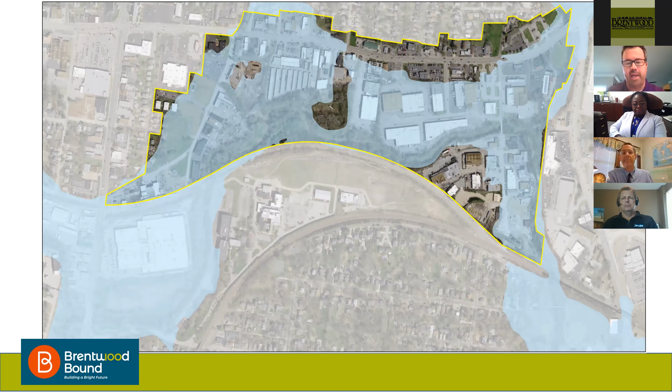So this is what that area looks like without the flooding. Your homes are over here on the left. Again, Brentwood Boulevard's here, Manchester Road goes across, and Hanley Road is over here.

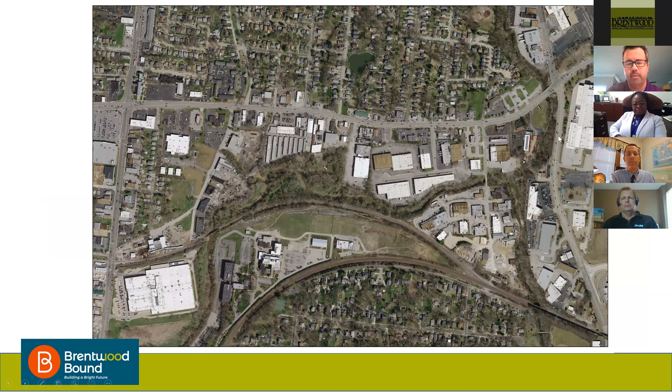This slide shows when Brentwood Bound is complete, what it will look like. This shows all the flood mitigation improvements and all the park improvements that we're calling the Deer Creek Greenway Connector.

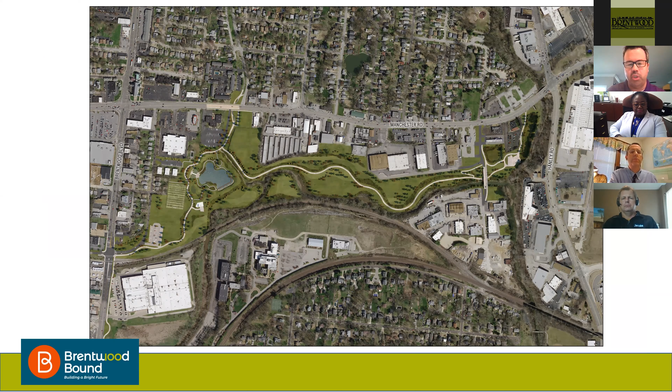This slide shows that once it's done, and during that same storm event that I showed you earlier, the water is captured in the areas where the city ultimately wants the water to go. That means the water is no longer going to Manchester Road, and no longer flooding the buildings along Manchester Road, to allow for future improvements to occur.

This is being done by making Deer Creek a more efficient creek, building these lakes to allow water to be captured during storm events, and also by removing some buildings from the floodplain.

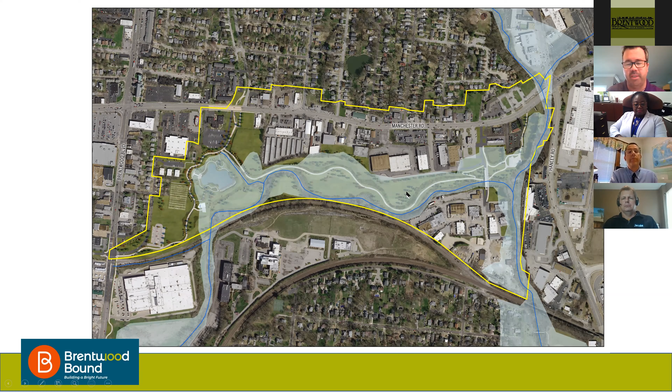The next project is the Manchester Road improvements. While the city was working on how to address the flooding, they learned about how MoDOT was doing improvements on Manchester Road from Hanley all the way down to Lindbergh and Kirkwood.

The city was able to work with MoDOT and, for a fraction of the cost, do enhancements beyond the MoDOT enhancements to improve the Brentwood section of Manchester Road.

Some of those improvements are mill and overlay pavement along Manchester Road. As you can tell, the road direly needs it, especially as Missouri American Water works through the corridor as we speak. They're also going to replace the bridge at Hanley Road and Manchester, and do sidewalk, ADA, and traffic signal improvements.

Some enhancements Brentwood is going to do include building a tunnel underneath Manchester Road where Mary Avenue and Van Mark Way intersect Manchester Road. That will allow safe passage for pedestrians from the new Norm West Park to the south to Rogers Parkway to the north.

Brentwood's paying for additional street signage and decorative lighting. They're improving the access management of businesses along Manchester Road, creating more safe conditions, and they're also going to add a 10-foot wide shared use path on the south side of Manchester Road.

So ultimately, when you enter Brentwood, either coming from the east near Hanley Road, or from the west where Brentwood starts at Bremerton, you'll immediately notice the differences on Manchester Road in the Brentwood area. That's a quick high-level overview of the flood mitigation and Manchester Road improvements.

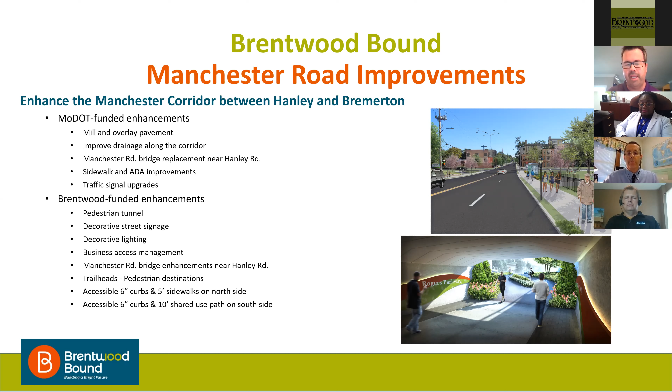I will now turn it over to Andy Franke. He is the landscape architect for Brentwood Bound, and he will talk about the park improvements.

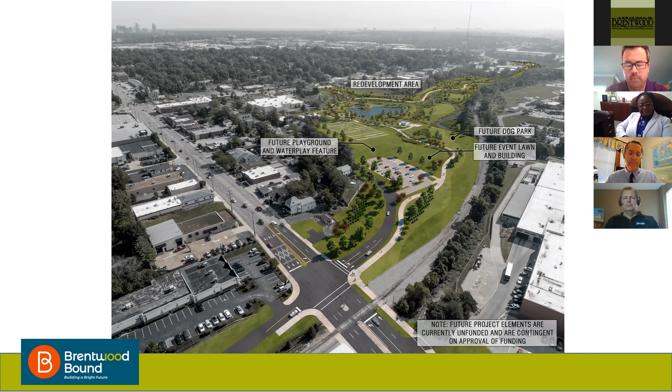The after image shows that where the GRG connector trail will come out on the south side of Manchester Road, under the underpass that's going to be built as part of the Manchester Road improvement parts of the project. You can see the GRG connector trail snake through there. One of the things that's really apparent is you can see the Mary Avenue storage basin right in the middle of the image. You can also see the Phase 1 trail that will peel off from our GRG connector trail and move down through the flood mitigation area.

This is a reverse image. On the right-hand side of this image, you can see the soccer field and then the future dog park as well. This gives you a pretty good idea of what's going to happen within Norm West Park. One of the other things you can just barely see in this image, just below the soccer field, is the Executive Walk Parkway, or Executive Walk apartments, that will remain as part of this project.

And finally, a little bit farther on the east side, not immediately adjacent, but near those apartments, will be the amphitheater. So that's the after image for that one.

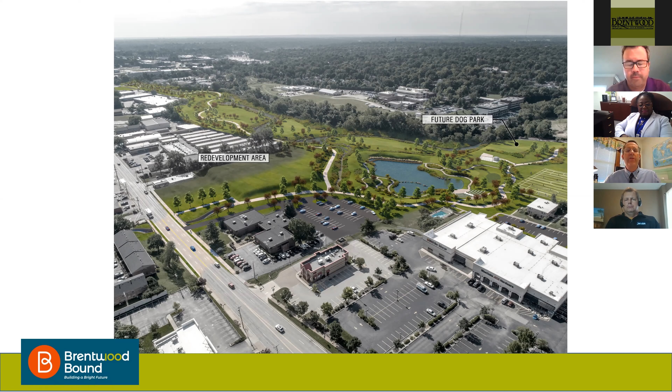The after image shows the extent of the expansion of the floodplain area, and it will also show the Phase 1 trail coming through that area. And you can see Deer Creek once a lot of the vegetation's removed and the grading is done - you can kind of see Deer Creek will be there as well. So in the background behind this, you can see the redevelopment area. This flood mitigation area will serve as an amenity for the redevelopment area and the trail as well.

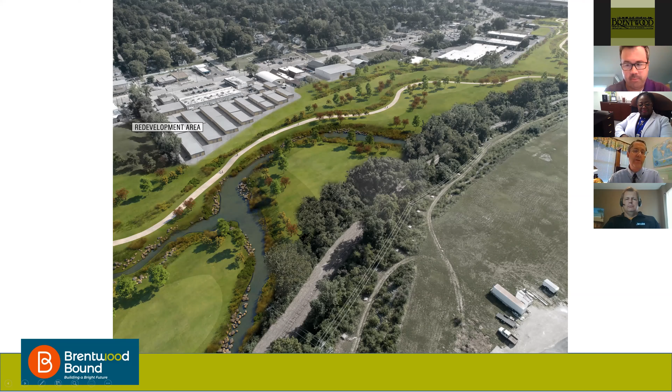The next slide we're going to show you is a before image of what we're calling the Phase 2 flood mitigation area. When this slide pops up, on the right-hand side you're going to see the Auto House BMW building. You can see Deer Creek directly behind it, and you can also see Breckenridge Industrial Drive, or Court, excuse me, coming through on the left-hand side of the image. So this is the before image.

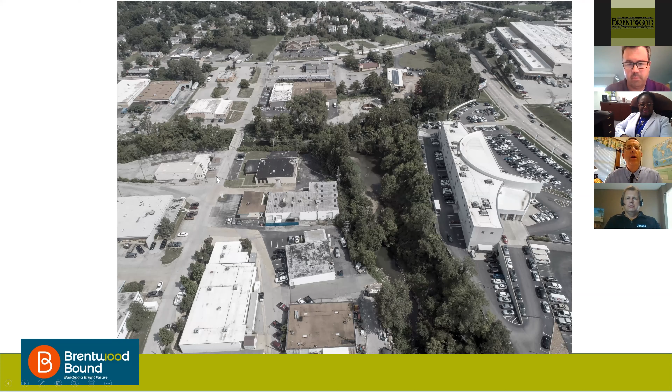Some of the other landmarks are Popeyes and Joy Luck, and then Frederick Roofing, all kind of towards the Manchester Road part of the project. This is the after image.

One of the first things that you see here is the new Breckenridge Industrial Bridge over Deer Creek. You can see the Phase 1 trail coming from the west, and it will actually go underneath that bridge, and then it'll come into the Phase 2 flood mitigation area. The Phase 2 flood mitigation area will have two basins, or flood storage areas, in it.

You can see the first one immediately south of the car wash area. There'll be another one located on the Frederick Roofing property. Snaking through this area is a trail that will connect the Phase 1 trail up to the south side of Manchester Road, where there'll be a multi-use path constructed as part of the Manchester Road improvements as well.

One of the other things that's important to understand about that image is MSD has a tunnel facility right in the middle of that, shown where Craig's got his cursor right now. Nice job, Craig, thanks for pointing all that stuff out.

The next image, and I think our final one, is an aerial view hovering over Brentwood Boulevard and Marshall Avenue, looking at the Bi-State Garage facility. This is the before image.

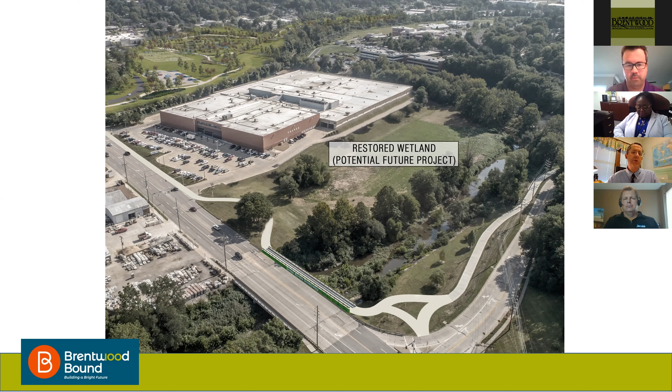So that's a quick snapshot of the projects, primarily the flood mitigation and the GRG connector projects. Next, I'd like to turn it over to Phil Blond, who's going to talk about Executive Walk and Norm West Park and the new improvements there.

Thanks, Andy. Just to orient everybody, there's an existing aerial photo on the left. Mary Avenue is pointed out by number 1. Number 2 is the current location of the Executive Walk apartments. The apartments themselves aren't moving, but there's a proposed change to their access—currently, residents drive on Mary Avenue and enter their parking lot from there.

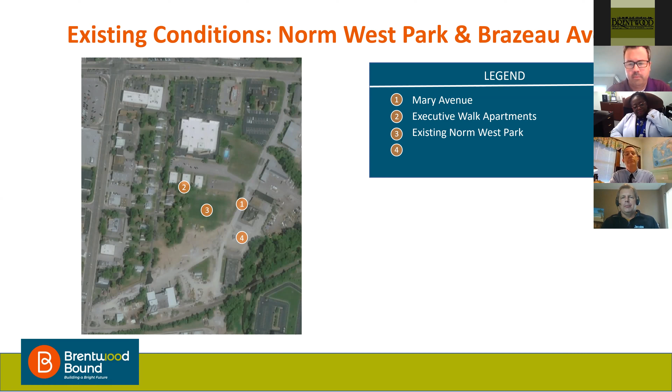Number 3 is the existing Norm West Park, which currently has a temporary dog park and a soccer field. Number 4 is an MSD diversion structure that's currently there; we'll continue to provide access so MSD can continue their activities.

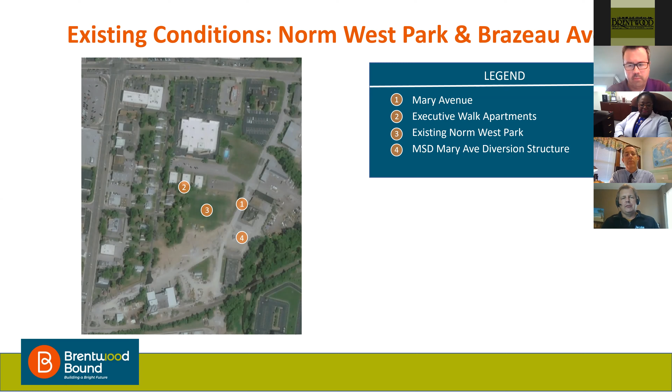The next slide shows the proposed conditions for the same area, with a number of new improvements. Number 1 at the top is the new tunnel under Manchester Road, connecting the Rogers Parkway path with the GRG connector path.

The Deer Creek Connector Trail is number 2. That trail will go from Brentwood's internal trail all the way down to where Andy showed in the last slide, connecting down Marshall Avenue to another Deer Creek Greenway recently built through Webster Groves. Eventually, this Brentwood trail system will connect via GRG's trails through their entire system.

Go on GRG's website and you can see their plans for connecting a whole host of future trails—that'd be really great to have access to. Number 3 is additional trail going through the Deer Creek flood mitigation area towards Manchester Road, closer to Hanley, where that trail ends up. Number 4 is the Executive Walk apartments, and number 5 is the location of their new access.

All of the improvements that you see on the map, including some I haven't pointed out yet, plus some additional plans that MSD has, all contribute to no longer being able to provide access to the apartment buildings via Mary Avenue. Mary Avenue, by and large, is going away and will become parkland.

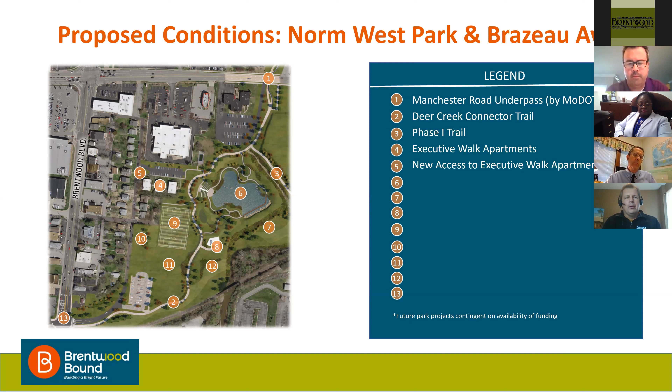The existing Executive Walk apartments' parking lot on the west side nearly abuts an existing public street, Brazeau Avenue. So the proposed plan is to construct a new entrance to their existing parking lot from the west, directly to Brazeau. There are about 24 apartments in the buildings right now. Number 6 is the Mary Avenue storage basin you saw in previous slides.

Number 7 is a flood improvement area, extending well east off the screen, an area of improved floodplain that the Deer Creek Connector Trail goes through. Number 8 is the MSD structure presently on Mary Avenue that'll be accessible via the trail. Number 9 is the proposed soccer field, roughly in a similar location as the existing one, but newly constructed.

Number 10 is the future playground and water play area adjacent to the soccer field. That will be part of the project pending future funding, as well as number 11, a planned area for the event lawn, and number 12, a planned area for a future dog park.

Another thing in the works potentially would be a traffic signal, should St. Louis County approve that, to improve access. Brazeau Avenue would be extended to intersect with Brentwood Boulevard where the present Russell intersection is, so there'd be a new 4-way intersection.

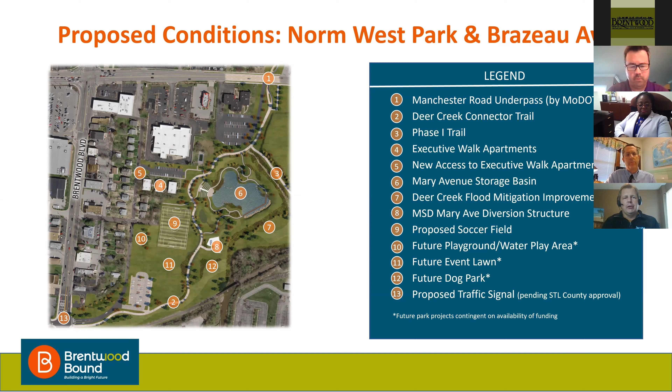You see some extra lines there. The yellow lines outline the proposed parking lot. The pink and green lines bending from Brazeau into and out of the parking lot are a traffic turn analysis, demonstrating that a fire truck or a larger vehicle like a garbage truck would be able to utilize that access and make all required turns, both without impacting current parking on the west side of Brazeau Avenue. It should be noted that Brazeau Avenue is about 24 feet wide in this area.

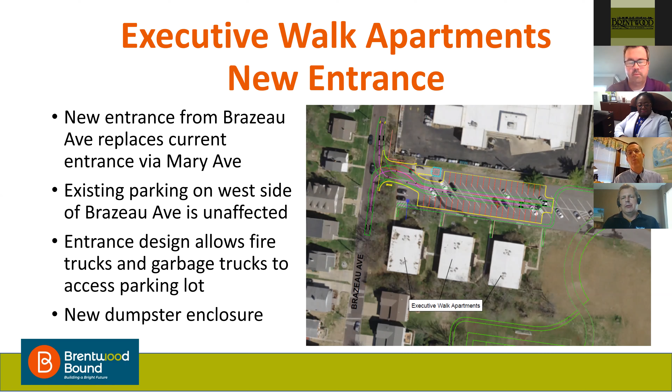The proposed entrance is 30 feet wide at the entrance, narrowing to about 22 feet wide for the driving lane between the parking stalls. There's a new enclosed dumpster to be provided. That's about all the highlights of this new configuration. We feel this provides a good alternative access to Executive Walk apartments.

The new entrance to Brazeau for Executive Walk apartments, we expect that construction to take a few months, so mid-to-late spring 2021 could be the potential opening date. Mary Avenue will stay, and the entrance to Executive Walk Apartments via Mary Avenue will stay until the new entrance is open, and then it can be closed after that. That's how I had it on the schedule.